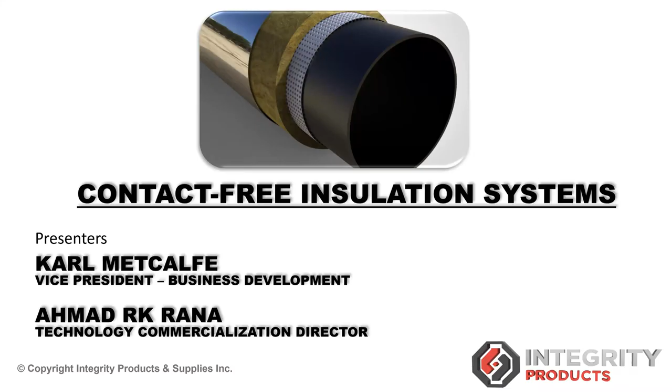My name is Karl Metcalfe. I'm VP of Business Development here at Integrity Products. I've been with Integrity Products for almost 4 years now. Degree qualified in business procurement and supply management, and I have over 18 years experience in the construction sector and the oil and gas industry. Joining me here today is my colleague Ahmad. Ahmad, would you like to do a quick introduction?

Yeah. It's almost 1 year. Speaking in terms of my education, I have a master's degree in materials corrosion engineering. And talking about my experience, I have almost 10 years of experience dealing with corrosion, in terms of my capacity as a field inspector, asset integrity, as well as R&D professional.

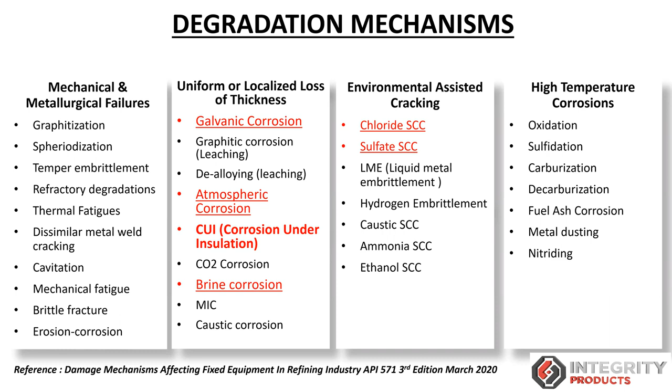And it is quite interrelated to chloride stress corrosion cracking and sulfate stress corrosion cracking. So even looking at the latest definition suggested by the API standard, it says external corrosion and external chloride stress corrosion cracking. So basically both of these things, external corrosion and chloride stress corrosion cracking, are being addressed under the umbrella of CUI itself. So even though chloride stress corrosion cracking is a separate degradation, because of the failure mode of CUI, it's being included under CUI.

Speaking about CUI, it was reported as early as back in the 1950s, but the recommendations to address this issue came in the mid-80s and late 90s. In the late 90s, we had the NACE SP0198 document, issued back in 1998, but the main focus of this document was about protective coatings for CUI mitigation.

And when we talk about the impact of CUI, it's a widely accepted and published fact that 40 to 60% of piping failures overall are because of CUI. If we try to narrow it down and quantify that in terms of pipe size, this impact is much higher for small size piping. For piping with 4 inches and less, 81% of failures are because of CUI. Another case study published by ExxonMobil, I believe in Corrosion 2003 in San Diego, California, revealed that 10% of the maintenance budget of any hydrocarbon industry is spent dealing with CUI-related damages.

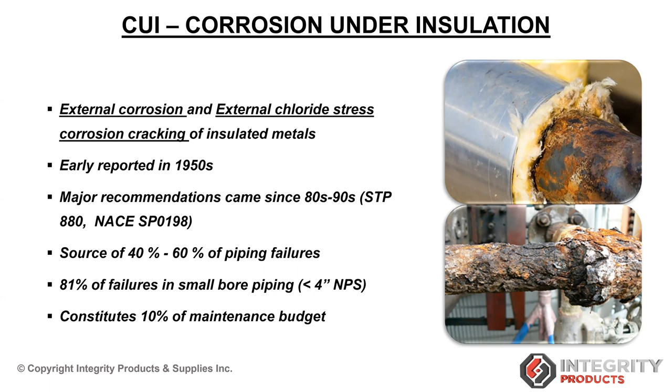So as I just talked previously about stress corrosion cracking, it could be sulfate stress corrosion cracking or chloride stress corrosion cracking. The concept is the same, both are external to the surface of the pipe.

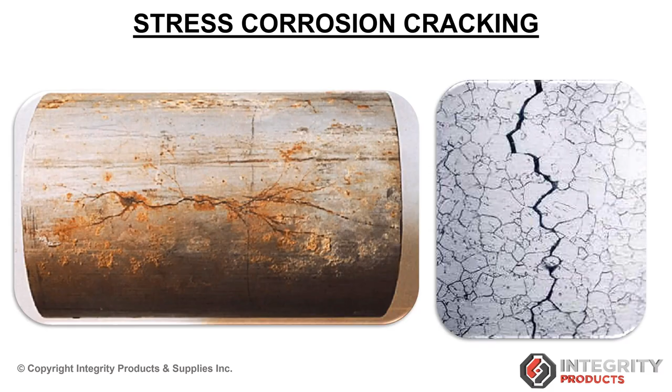Speaking about CUI, it's a widely accepted fact that CUI is a prevalent degradation across the industry. But still there is uncertainty. It's still a gray area when we try to quantify the impact, the probability, or the consequence of CUI.

Even the modern recommended practice for the semi-quantitative analysis of CUI, which is most widely used, takes into consideration the design factors for calculation of CUI. Those design factors could be the material composition itself, the base corrosion rate of the material, and also the geometrical factors, the interface of piping and the pressure vessel or storage tank itself, or various complexity factors.

It also takes into consideration the insulation factors - the type of insulation, whether we are using calcium silicate, mineral wool insulation, or foam glass - and the impact of the type, as well as the age or condition of the insulation, and also the surroundings that have a decisive impact towards CUI.

When we speak about the surroundings, it's the external environment and also the neighborhood factors. The external environment could be proximity to a marine location, or cooling tower drifts itself, or water spillage from leaking lines, or from any neighborhood maintenance activity like hydrojetting or hydroblasting activities. These are all the factors that actually contribute to the CUI probability.

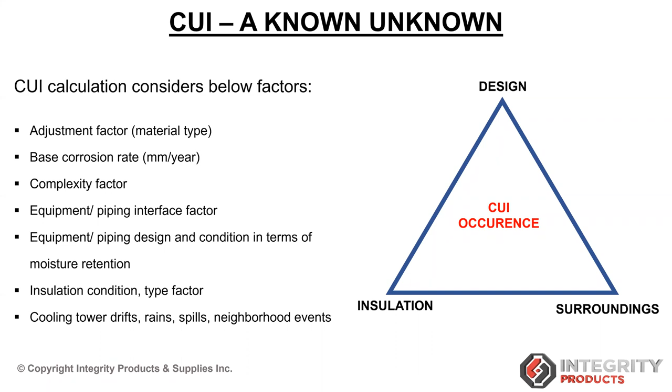Our approach towards product development starts either by seeing firsthand problems that our clients are experiencing in the field, or a lot of times it's from making ourselves familiar with some of the published research that's out there, and also the standards that have been displayed across the industry.

From there we look to design and start to prototype product ideas. We have capabilities of doing our own in-house technical drawings, and we've got 3D printers, so we can easily visualize and get our first product prototype in our hands. Usually from there we're looking at doing our own in-house shop testing, but at the earliest stage we're looking to push that out to larger scale field trials.

Once we compile that information and see how the product has done in a field installed condition for a number of months or whatever it may be, we look to do final validation on the product, any refinements we wish to make. We then usually try to push towards doing some third-party independent testing, and then we approach our goal of having a finished, ready for market product.

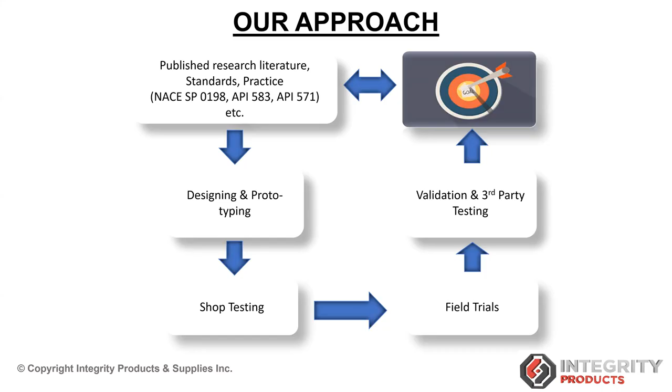Our mindset towards approaching the CUI problem has been that there's no one silver bullet which is going to solve the problem, but it absolutely starts at the design stage. If the designers are considering CUI and other degradations right from the design stage, then they will build better systems. We believe it's multiple barriers - pipe coatings, good insulation selection, auxiliary products as required, and of course not trapping the moisture, being able to detect and drain it. And then of course regular inspections are key for catching any potential problems at an early stage.

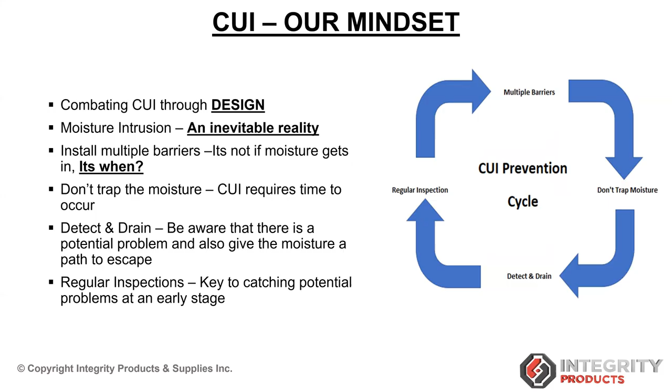Thanks, Karl, for that info. So speaking about the contact-free system, that is actually the theme of this presentation.

Looking at the API standard and NACE SP0198, they are in consensus about contact-free systems. API 583 suggests that contact-free insulation systems prevent water accumulation and chloride build-up on the steel surface. So basically, even if the insulation is soaked or saturated with moisture, we should have a provision that keeps it away from the pipe itself.

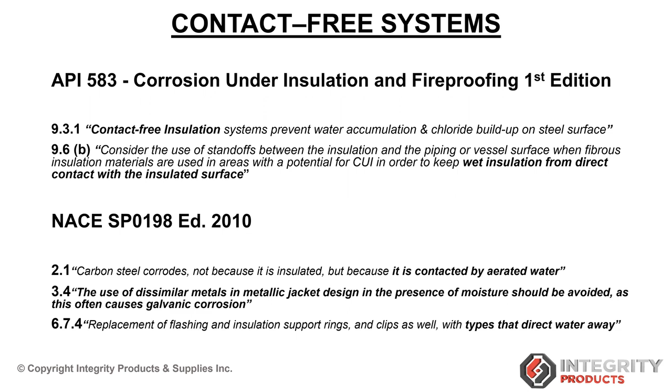And the NACE SP0198 standard cracks a myth by declaring that the cause of CUI is not the insulation, but rather aerated moisture - water containing CO2, oxygen, and other dissolved gases. So by having a contact-free system that keeps the aerated moisture away from the pipe, that would be an effective mitigation towards CUI.

Leading from there, we have developed a few different systems for creating a contact-free insulation system. We have our silicone blocks, which are installed via banding - they strap directly to the pipe, and the insulation is oversized and placed over them. We also have our PPS spacers, which simply stab into the insulation for a very easy install, and then it's placed over the pipe. So they work very well.

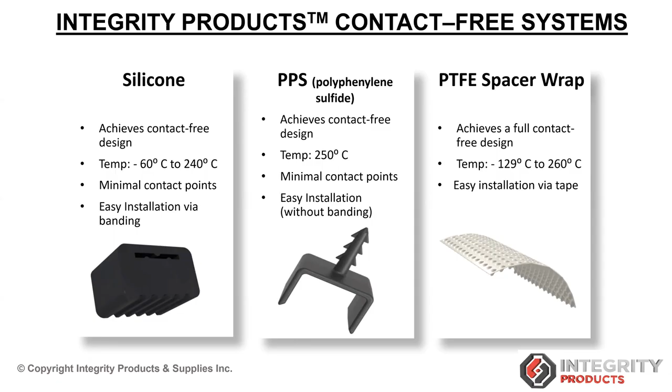And our latest product is the PTFE spacer wrap, which is a full wrap installed directly onto the pipe before insulation is installed.

Here we have a few images showing how that's done. In the top left, our silicone blocks have a slot built through them, so you can easily install them with a band, and the insulation can go straight over top. The polyphenylene sulfide spacers have a spike on them which allows you to stab it directly into the insulation, and then the insulation is placed onto the pipe. With both of these, we've tried to minimize the actual contact points between the device and the pipe itself.

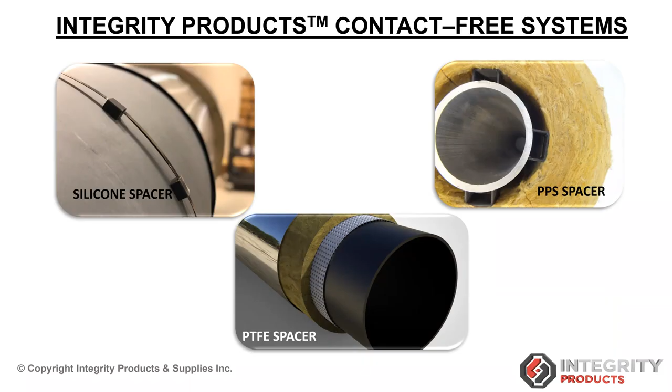Our PTFE spacer wrap is a fully encompassing wrap placed on the pipe prior to insulation being installed. It's installed with the dimple side down, creating a 6 millimeter gap between the pipe surface and the insulation. We recommend on the longitudinal joint that it's just a butt joint - there's no need for an overlap at the 6 o'clock position. For a circumferential joint, we recommend a 2-inch or 2-dimple overlap.

We're also recommending the use of non-metallic strapping or tape to install it. Our recommendation is the 3M 69 tape, which is a high temperature tape. Here's a nice visual showing it clearly - we've got the PTFE spacer wrap placed directly onto the pipe, then the insulation going over top of it, and finally the metal cladding on the outside.

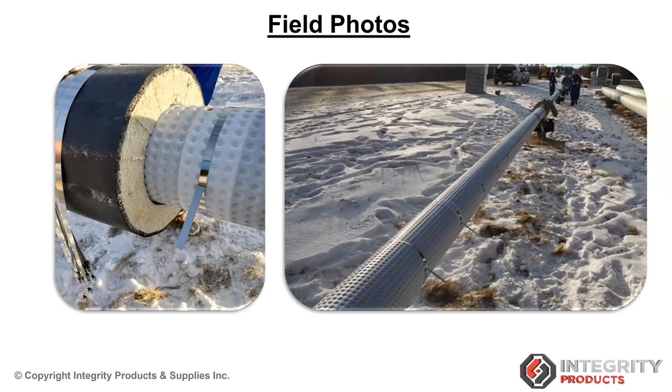Just a couple of field photos from a recent project we're working on. In this scenario, the contractor used metal strapping, but that's not something we recommend, due to the potential to poke a hole in the PTFE spacer wrap itself. You can see it's placed on the pipe, overlapped, and the insulation is then placed over top. We were very happy to get this product onto our first project and get some nice field shots of it being installed.

Thanks, Karl. I would like to share some findings from our testing project recently completed in collaboration with National Research Council Canada. The aim of this testing was to check the CUI performance of different types of insulation and configurations of insulation systems in conjunction with spacers and low point drains. All testing was conducted as per ASTM G189 standard by a third-party competent party.

Here is the experimental setup showing the arrangement. For this testing, we used uncoated carbon steel as a test coupon, covered with insulation and jacketing. On the top side, there is a funnel meant to introduce the electrolyte into the cell. On the right side, we can see an immersion heater.

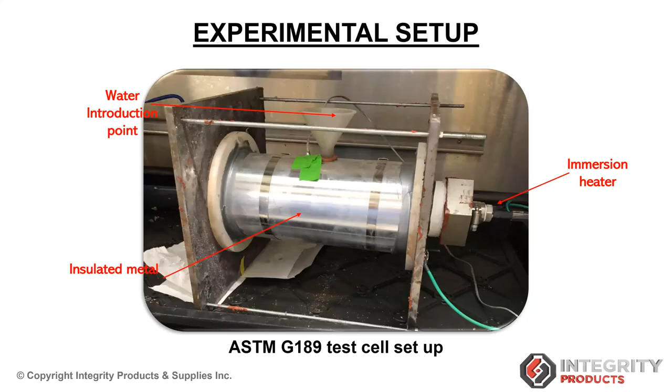The aim is to increase the temperature of the cell up to 100 degrees Celsius, since that's the most favorable range for CUI.

This project was divided into two phases. As part of phase one, we checked mineral wool insulation as well as hydrophobic blankets in terms of CUI performance, and also tried to check the performance of the mineral wool insulation in the presence of the PTFE spacer wrap.

Speaking in terms of experimental results, these are snapshots of the corroded coupon samples. On the left side is the original sample before the corrosion test started, containing grit 600 finish. The next sample was held directly in contact with the mineral wool. The third was directly in contact with the hydrophobic blanket. The last one was wrapped with mineral wool insulation, but with a contact-free system achieved using the PTFE spacer wrap.

Something to observe is that in the last sample on the right side, there is no corrosion at all on the surface. Rather, there is a change of color because of high temperature oxidation on the surface of the metal. There was no pitting or general corrosion in the presence of the PTFE wrap.

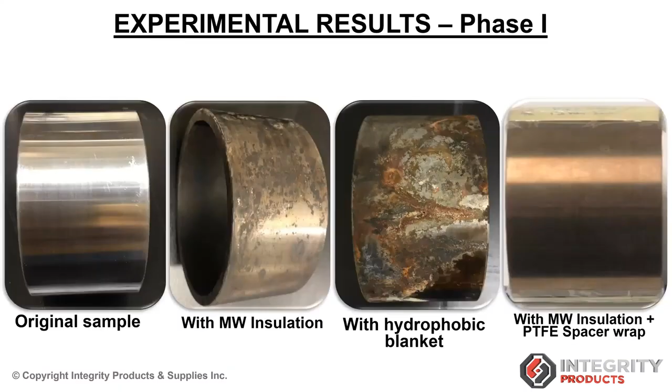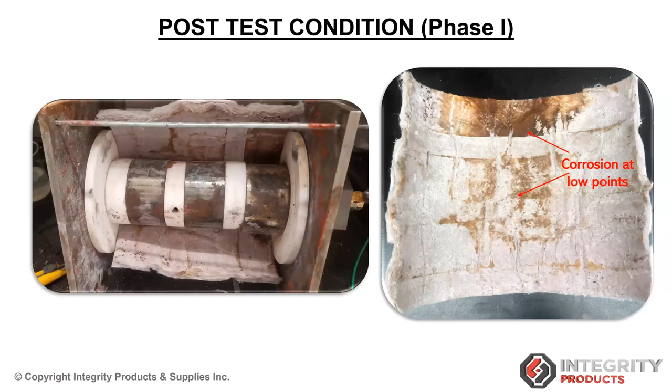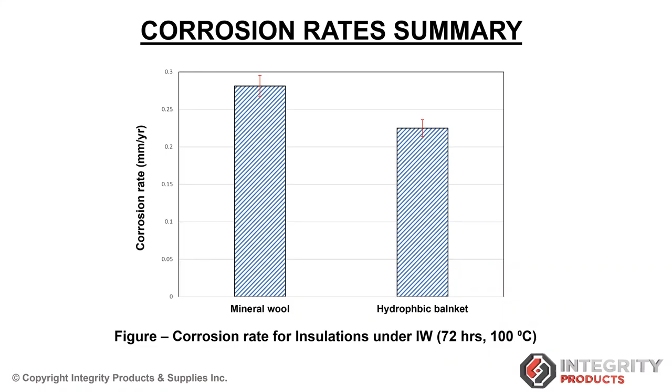Only the sample protected by the PTFE wrap never showed any signs of pitting, general corrosion, or any signs of stress corrosion cracking on the surface.

As part of phase 2 of this testing project, we used three different configurations, each made using mineral wool insulation. The first configuration was mineral wool insulation directly in contact with the pipe.

For the second configuration, we created a contact-free system using PPS spacers, polyphenylene sulfide spacers, to create a 16 millimeter gap between the inside of the insulation and the outer skin of the pipe. On the 6 o'clock position, we installed the low point drains, or the integrity drain plug, one of our products. That was the second arrangement.

The third arrangement we made for phase 2 of the testing was mineral wool insulation directly in contact with the pipe, and on the 6 o'clock position, we drilled the drain hole.

So here we can see in this figure, this drain hole looks a bit weird because it's misaligned. When we say low point drain hole, it's a combination of the hole in the jacketing and the hole in the insulation. When these holes are concentric, or aligned to each other, then it's a perfect hole. But even in the presence of pipe vibrations, thermal expansion, mechanical loading, or someone sitting on the pipe, there's a likely chance these holes can misalign from each other.

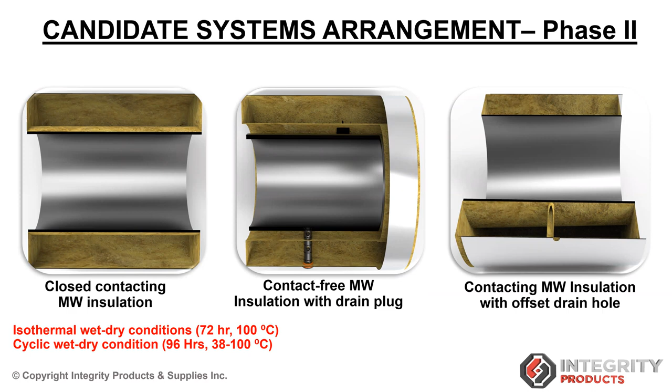So each of these configurations was tested against 2 conditions. There were 6 tests done in phase 2 of the project. One was isothermal wet and dry condition, meaning constant temperature, creating wet and dry conditions for 72 hours. The other was cyclic, fluctuating temperature between 38 degrees Celsius and 100 degrees Celsius, for a duration of 96 hours, or 4 days continuous testing. From this testing we got the mass loss data, and converted that into corrosion rate using the applicable ASTM standards. Here is the summary of corrosion rates for all these configurations.

We can see that the middle 2 histograms, the contact-free system achieved using the polyphenylene sulfide and the drain plug, have a much lower corrosion rate than the rest of the candidate systems. The reason is that the contact-free system is delaying degradation on the other side, and the low point drain is quickly draining the electrolyte from the system.

It's interesting that there's actually virtually no difference between the closed contacting system and the system with a drain hole. Once that drain hole becomes offset between the hole in the insulation and the hole in the cladding, or it collapses or gets clogged somehow, there's very little difference. You might as well not have a drain hole at that point. Exactly, that's the point. Either we have to re-drill the drain hole, or find some mechanical device, like a drain plug, that keeps it robust and operating, keeping that cavity clear.

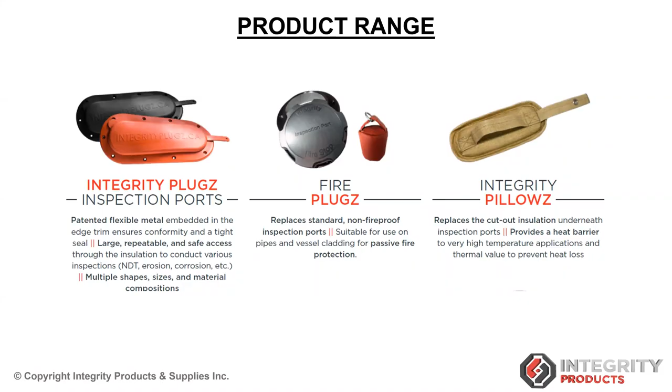We also have our integrity water indicators. These are again a simple device similar to our drain plugs, except they have a small hydrophilic elastomer ball built into the housing of the device, and when that comes in contact with flowing water, it just pushes out this orange notification.

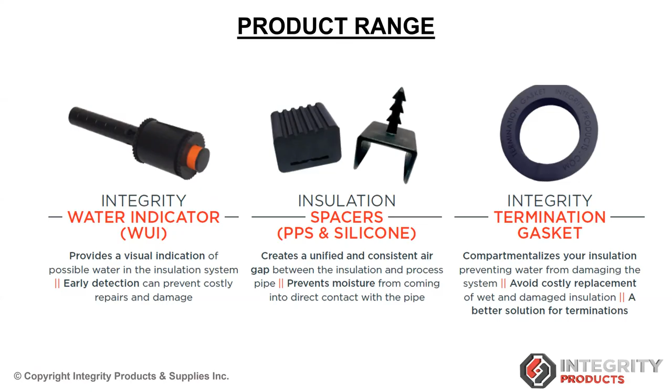As mentioned earlier, we've got our silicone and polyphenylene sulfide insulation spacers. We also have our integrity termination gaskets, which form a watertight seal at any point where you're looking to terminate the insulation. We make these for every pipe size, every insulation thickness, and they've been a key part of our product lineup in recent years.

As discussed in some of our testing, we have our integrity drain plugs, a simple device made from polyphenylene sulfide, so incredibly durable and hard wearing, high temperature resistant material. These can install up through the metal cladding and up through the insulation.

They have a serrated cutter head on them, which allows you to core out the insulation piece for install. And you can see those breakaway points all along the neck of the device, so you can just snap them off with your hand to suit your insulation thickness.

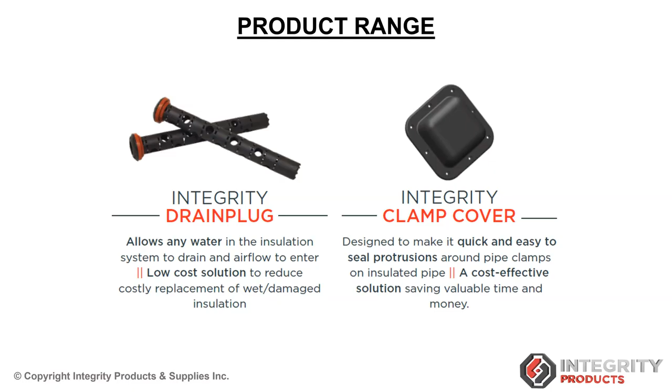We also have integrity clamp covers, created to form a watertight seal around penetrations from Grinnell clamps on the piping. Traditionally, contractors would build a metal box or try to seal around the clamp with silicone - usually a difficult piece of work - but we've created these integrity clamp covers, and we have them in various different sizes to suit many different applications.

This is one of the latest products we've been working on, and it's a whole system approach kind of thing. It's made up of a PVC dimple wrap which goes on the outside of the insulation, creating a gap between the insulation and the finished metal cladding. It works in conjunction with vents built into the sides at the 3 and 9 o'clock positions of the pipe, and also a drain tray at the 6 o'clock position.

So what this product is doing is allowing any moisture which has built up in the insulation - it's giving it a gap between the cladding that it can flow into, and then water or moisture can freely leave the system. This product is very new. We're still conducting field trials with a major asset owner here in Alberta, which has been fantastic, but there'll be certainly more to come on this over the next coming weeks.

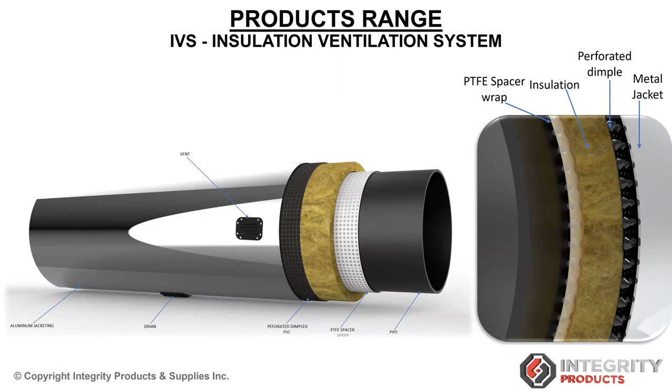So just to summarize what we've gone through: we had a look at CUI and the related degradations. We talked about contact-free insulation systems and our PTFE spacer wrap. We took a quick look at the ASTM G189 testing we conducted and some of the results we've seen from that, and we also did a quick overview of the rest of our product range.